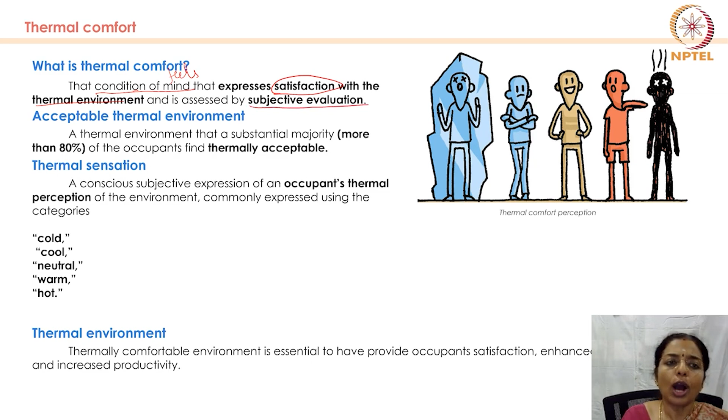It is the condition of the mind that expresses satisfaction with the thermal environment. And this is assessed by subjective evaluation. So how do you feel? How do you feel thermally in this environment? The answer to that should be comfortable. Then we say that it's a comfortable environment.

Then what is acceptable thermal environment? A thermal environment that most people, means what? More than 80% of the occupants should feel that it is a thermally acceptable environment. That is the definition of thermal comfort. An environment where at least 80% or more people feel comfortable is known as a thermally comfortable environment.

So how do you assess thermal sensation? How do you feel? How do you answer that question? If it is comfortable, well and good. If not, then it can be cold, or it can be cool, or it can be neutral, okay, I'm okay with this, or we can even say comfortable, or it can be warm, or it can be hot. This is 5 ways of describing how you feel.

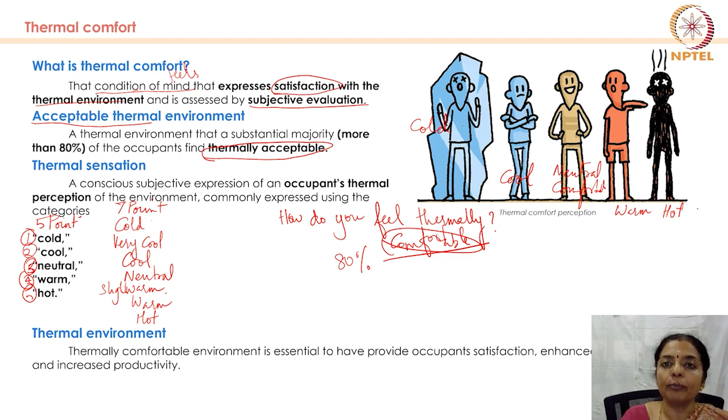So a thermally comfortable environment is essential for providing occupant satisfaction. For the occupants to feel satisfied, it is essential to have an environment which is comfortable, which enhances health as well as increases productivity, because it becomes very important in spaces like office buildings where people work for continuous hours, or classrooms where students sit for long hours. If it is not thermally comfortable, then it affects their health and also their productivity.

So thermal comfort refers to the state of mind in which a person feels satisfied with the temperature of the environment. It is highly subjective and depends on several factors, including your personal preferences, clothing level, activity level, and the surrounding environment. For example, a person coming from a very cold place would feel slightly warm in a place where the native feels comfortable. So, what is your personal preference?

Then, what clothing levels you wear? Suppose in a hot, dry place, you end up wearing a sweater. Then you are going to feel warmer or hotter. What is your activity level? We have seen how athletes who run, they sweat so much, they pant so much, they feel so hot, they drink a lot of water. Marathon runners pour water on their head because of the activity level. And of course, the surrounding environment such as temperature, humidity, wind speed, and the radiant temperature. So these are all the factors on which thermal comfort depends.

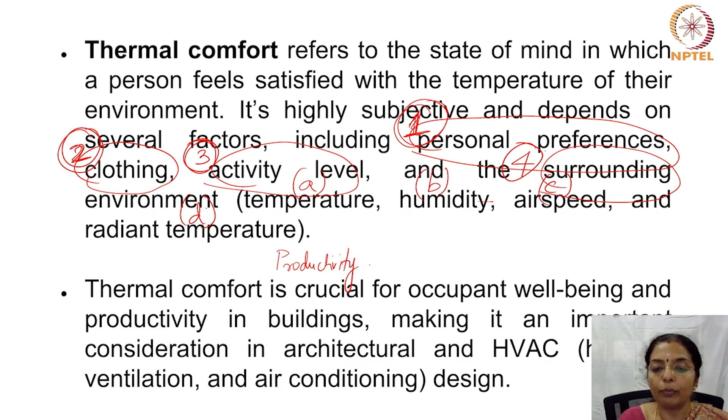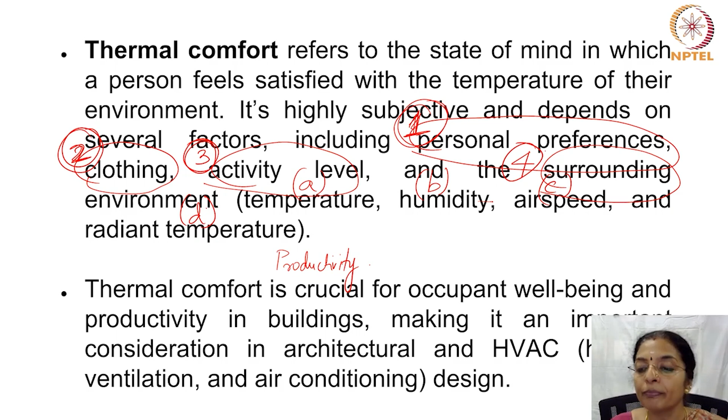So thermal comfort is crucial for an occupant's well-being and productivity in buildings, making it an important consideration in architectural as well as HVAC design. So when the productivity of a person is impacted, then the whole point of designing goes for a toss. If you design a school building where a student is not able to give his 100%, then the whole point of designing the school is lost. Similarly, if you design an office space where the person who works there is not able to give his 100%, then the whole point of designing the office building is lost. And therefore, it is very important that we design thermally comfortable buildings.

So why is it necessary? Why should we design thermally comfortable buildings? So human beings are homeotherms. Therefore, in different environments, even in extreme cold or hot situations, people can maintain their core body temperature in a narrow scope through thermoregulation. So what are these thermoregulations? We will see a little later.

So thermal comfort can also be defined as a person's own awareness of the thermal atmosphere, and it is defined as a person's neutral feeling in relation to a given thermal environment without sweating or shivering. The person's location as well as the climatic conditions within and outside the enclosure influence the thermal comfort standards. People feeling uncomfortably hot or uncomfortably cold are more likely to behave unsafely. Their ability to take decisions or perform manual tasks deteriorates.

Now, there are ways in which the body exchanges heat to the environment. So, how does the body exchange heat? One is through conduction. So, through physical contact, probably with the ground, or maybe with holding something in the hand, the body conducts heat exchange with the object. Second is through convection. So convection is not necessarily through a solid medium. And third is radiation. Apart from this, sweat, exhalation and insensible perspiration through evaporation also happens with the atmosphere.

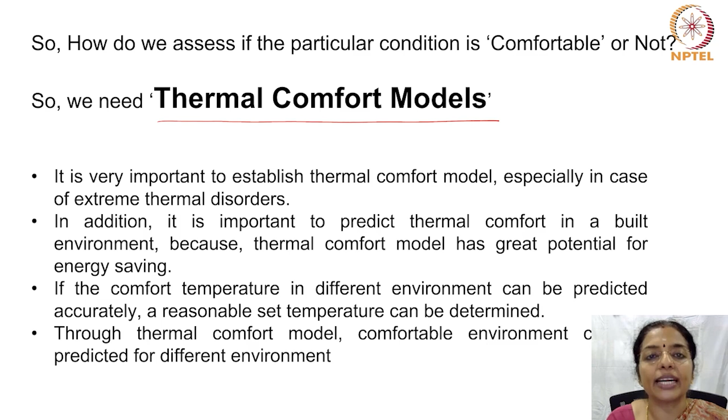In addition, it is important to predict thermal comfort in a built environment, because thermal comfort model has a great potential for energy saving. If the comfort temperature in different environments can be predicted accurately, a reasonable set temperature can be determined. Through thermal comfort model, comfortable environment can be predicted for various different environments.

Let us now look at thermal comfort model. A model that relates indoor design temperature or acceptable temperature ranges to outdoor meteorological or climatological parameters is a thermal comfort model. Comfort models are frameworks which are used to predict and evaluate human thermal comfort in various environments. In architecture and building design, thermal comfort models are essential for designing energy efficient buildings that will maintain the occupant comfort while using very little energy, so that we have to try and work towards designing sustainable buildings.

Now, thermal adaptation to indoor environment happens in three ways. First is adjustment, which is behavioral or technological changes. So you need to adjust to a particular setting. Second is acclimatization, which is physiological and which is based on a thermal history. What do you mean by thermal history? If a body has been exposed continuously to very warm weather, then their ability to tolerate heat becomes more. To tolerate heat, okay, not to tolerate the inner body temperature to shift. That will not happen. Then habituation, which is a psychological adaptation with changing expectation.

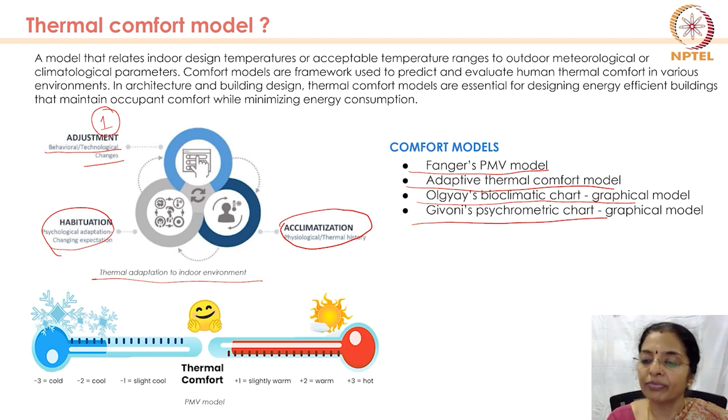So there are various thermal comfort models. There is Fanger's PMV model. There is adaptive thermal comfort model. There is Olgyay's bioclimatic chart. There is Givoni's psychrometric chart. So these we will be looking at, say, the psychrometric chart and so on a little later. We will be dealing with it in detail in another lecture.

So there are two main classifications of thermal comfort. First is the steady state model. So the predicted mean vote model stands amongst the most recognized thermal comfort models. It was developed using principles of heat balance and experimental data collected in a controlled climate chamber under steady state conditions. Therefore, PMV model can be applied to air-conditioned buildings only.

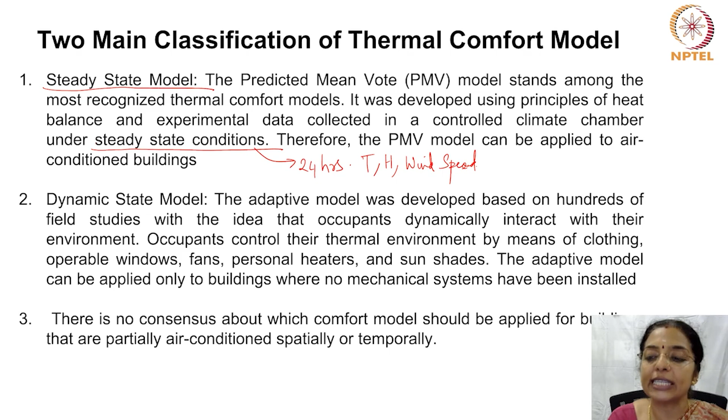So, what do you mean by under steady state? For, say, 24 hours, the temperature, humidity, wind speed, everything is fixed. And in that, people are assessed how they feel. But that is not the reality. In reality, the temperature indoors will not change only in air conditioned buildings because it is set so. Therefore, steady state model is applicable to air conditioned buildings.

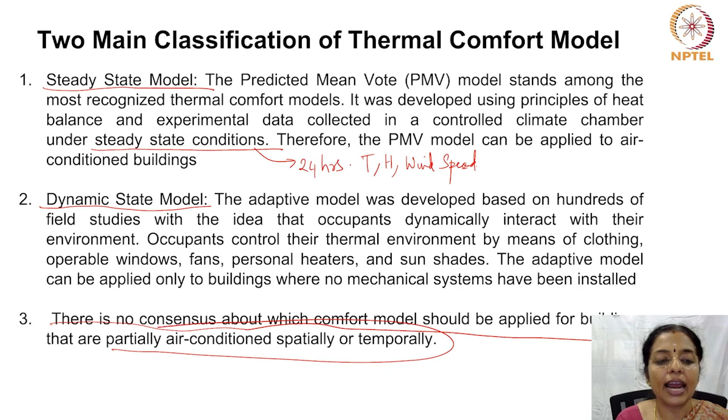Second is dynamic state model. So the adaptive model was developed based on hundreds of field studies with the idea that occupants dynamically interact with their environment. Occupants control their thermal environment by means of clothing or operable things like opening the windows when they feel very sultry, switching on the fans, using personal heaters, and then having some shades and so on. The adaptive model can be applied only to buildings where no mechanical systems have been installed. As of now, there is no consensus on which comfort model should be applied for buildings that are partly air conditioned and partly naturally ventilated.

I am going to talk to you about at least 4 models of thermal comfort, and there is a reason for it. Later on, we will be learning about certain tools to assess appropriate strategies for designing, and in those tools there is mention of these models. So for you to understand what these models are, I am going to talk to you about these models. The first is the ASHRAE Standard 55 and Current Handbook of Fundamentals model.

So ASHRAE 55 was first introduced in 1966 to establish guidelines for maintaining thermal comfort in indoor spaces. Over a period of time, the standard evolved, becoming more precise in identifying environmental and personal factors that influence comfort. The PMV or predicted mean vote and PPD or predicted percentage of dissatisfied model, which was developed by Fanger, has been the foundation of this standard. This approach was suited for climate-controlled environments where variables such as air temperature, radiant heat, air speed, and humidity could be managed precisely. The model was based on assumptions made in controlled environments like climate chambers, and it didn't fully consider behavioral adaptation of occupants.

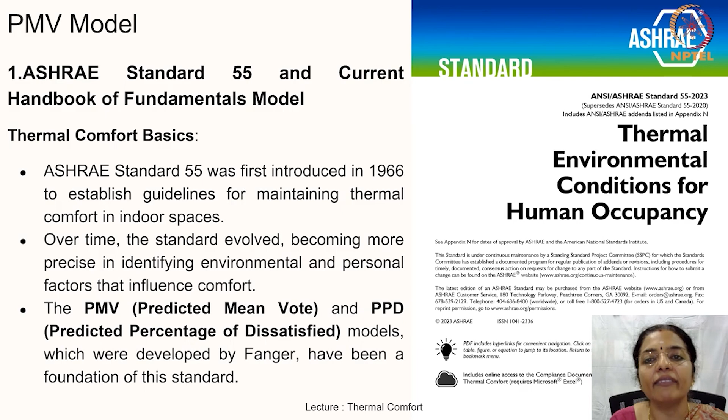The ASHRAE Standard 55 and current Handbook of Fundamentals model is a widely recognized standard for defining thermal comfort in indoor environments, and it was developed and maintained by ASHRAE, which is American Society of Heating, Refrigerating and Air-Conditioning Engineers. The standard specifies conditions under which a majority of people will feel comfortable and provides guidelines for designing HVAC systems that ensure thermal comfort in buildings. This model is applicable to both mechanically conditioned and naturally ventilated spaces.

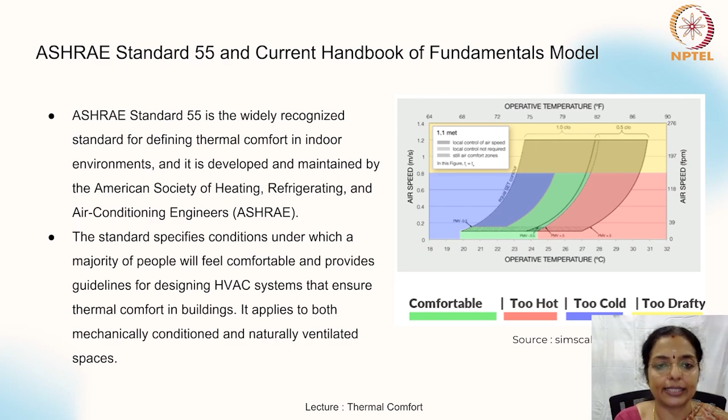So the key components of ASHRAE Standard 55 are, first, acceptable thermal conditions. This standard provides acceptable temperature ranges and guidelines based on different levels of humidity, clothing, and activity. It talks of comfort zones. So it uses comfort zones to define acceptable temperature and humidity combinations that would keep most people comfortable. Then local thermal discomfort. This considers issues like draft, radiant temperature asymmetry, vertical temperature difference, and floor temperature. ASHRAE Standard 55 uses two main models to predict thermal comfort: the PMV-PPD model, which is predicted mean vote and predicted percentage of dissatisfied model, as well as the adaptive comfort model.

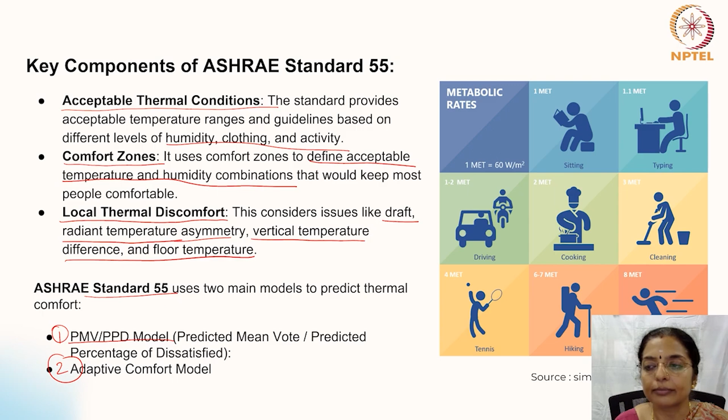Now, what is a PMV? Predicted mean vote model. So, PMV predicts the thermal sensation felt by a large group of people in a particular indoor environment. It is calculated using factors such as air temperature, which is the temperature of the air surrounding the occupants.

The mean radiant temperature, which is the average temperature of all the surrounding surfaces which emit heat. Next is the relative humidity, which is the amount of moisture present in the air. The air velocity, which is measured in meters per second.

The clothing insulation, provided by the occupant's clothing, measured in clo. The metabolic rate, measured in METs, indicates the level of physical activity.

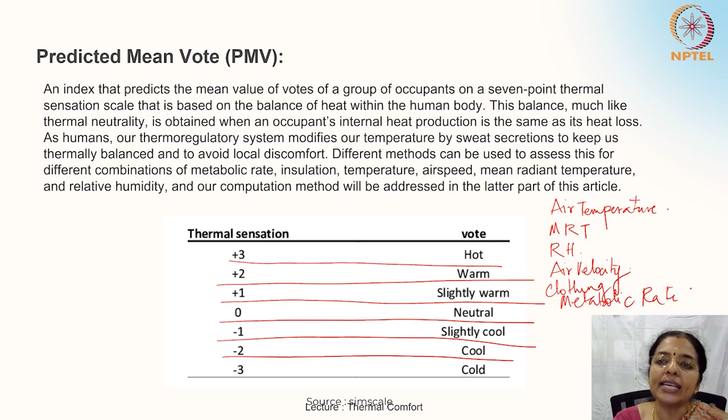These factors are integrated into a complex equation that outputs the PMV score, and that score ranges between hot, warm, slightly warm, neutral, slightly cool, cold. The goal is to achieve a PMV value as close as possible to 0, which indicates that the majority of people will find the indoor conditions neutral and comfortable.

So this is an index that predicts the mean value of votes of a group of occupants on a 7-point thermal sensation scale that is based on the balance of heat within the body. This balance, much like thermal neutrality, is obtained when an occupant's internal heat production is the same as the heat loss. As humans, our thermoregulatory system modifies our temperature by sweat secretions to keep us thermally balanced and to avoid local discomfort.

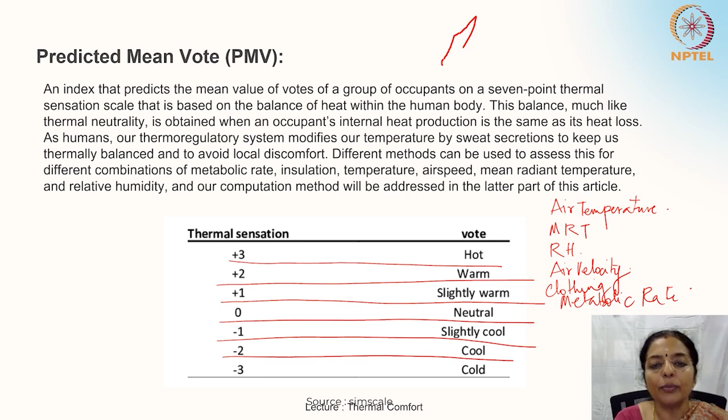Different methods can be used to assess this for different combinations of metabolic rate, insulation, temperature, air speed, mean radiant temperature and relative humidity, and our computation method will be addressed later.

The PPD. PPD provides a statistical prediction of how many people will be dissatisfied with a particular thermal environment. Even in the best environments, when PMV is neutral, that is when PMV is zero, a certain percentage of people will still be dissatisfied because individual preferences vary. This is why achieving 100% satisfaction is practically impossible.

Suppose there is a PPD of 5%. A PPD of 5% is an ideal range where only 5% of people are predicted to be uncomfortable. The target is to maintain PPD value below 10 to 20%.

So PPD is an index that establishes a quantitative prediction of the percentage of thermally dissatisfied occupants who feel too warm or too cold. The PPD is calculated from the PMV, as it can be found from the distribution of individual thermal sensation votes compiled collectively.

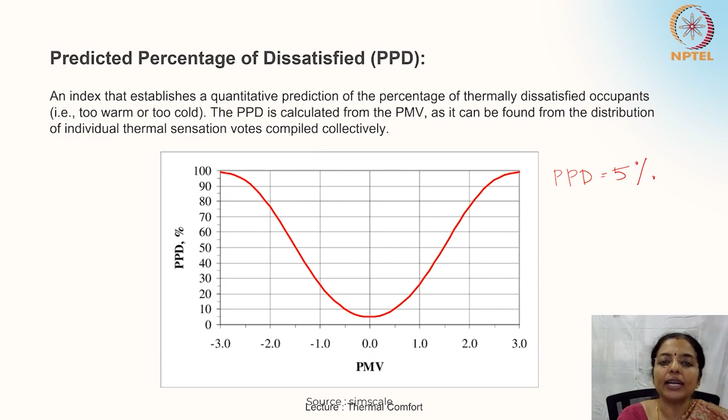The second is the adaptive comfort model in ASHRAE Standard 55-2010. So there was a need for a new approach. Before 2010, ASHRAE Standard 55 focused heavily on mechanically conditioned buildings. These require precise control over indoor environments. You set the AC temperature at 26 degrees centigrade or 24 degrees centigrade. So it's a set temperature.

As interest grew in naturally ventilated buildings, because that's more efficient, sustainable and environmentally friendly, it became very clear that the PMV PPD model wasn't always applicable. People in naturally ventilated spaces tend to adapt to varying temperatures, accepting a wider range of conditions.

Third is the ASHRAE Handbook of Fundamentals Comfort Model up through 2005. So in the pre-2005 comfort model, the PMV PPD model dominated thermal comfort calculations. This approach was suited for climate controlled environments where variables like air temperature, radiant heat, air speed and humidity could be managed very precisely, because these were air conditioned environments. You have to set it on your remote.

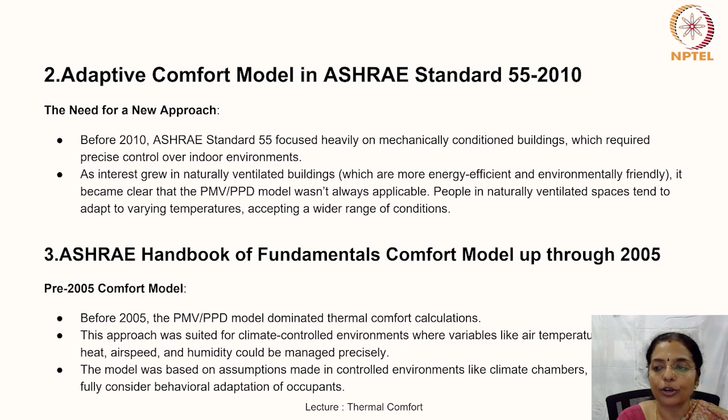The model was based on assumptions made in controlled environments like climate chambers, and it did not fully consider behavioral adaptation of occupants. That was its flaw. So the adaptive comfort model in ASHRAE Standard 55-2010 came up. Earlier, this primarily relied on PMV and PPD models, which were based on controlled laboratory settings.

These models assumed that indoor environments would be mechanically controlled and maintained within a narrow range of temperature and humidity levels. However, these assumptions were not well suited to naturally ventilated buildings, where indoor conditions fluctuate based on the weather and where occupants can take actions to adjust their comfort.

In response to the growing emphasis on sustainable building design and the desire to reduce energy consumption, the adaptive comfort model was introduced in the 2010 revision of ASHRAE Standard 55. This enables building designers to set higher or lower indoor temperatures based on outdoor conditions, reducing the need for energy intensive heating, ventilation and air conditioning systems, promoting the use of natural ventilation.

The adaptive comfort model, or ACM, in ASHRAE 55-2010 is a paradigm shift from earlier models of thermal comfort, which were designed for tightly controlled indoor environments with mechanical heating, ventilation and air conditioning systems.

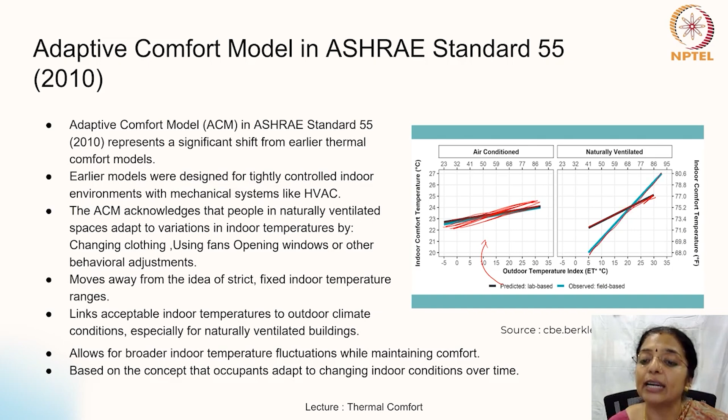So the adaptive comfort model is based on the principle that individuals adapt to their environments and that acceptable indoor temperatures vary depending on outdoor conditions. The model considers the following. Outdoor temperature. As the mean outdoor temperature rises, people tend to accept warmer indoor temperatures. Conversely, in cooler climates, people prefer cooler indoor conditions.

Second is behavioral adaptation. These words you would have seen in my previous slides. So what is behavioral adaptation? Occupants are more tolerant of temperature fluctuations when they can take actions like opening windows to get fresh air, using personal fans, adjusting clothing layers, changing the location within the space like moving closer to a window or away from a window or moving closer to a heat source, etc.

So an occupant can tolerate temperature variations or fluctuations if he has the option of operating windows as per his desire, using personal fans, changing his clothes. If it's very warm, he can change his clothes to something very light, decrease the clo value. And by these two, we mean altering the environmental parameters like wind, relative humidity, sometimes even temperature. Changing the location within space like moving closer to or away from windows or heat sources.

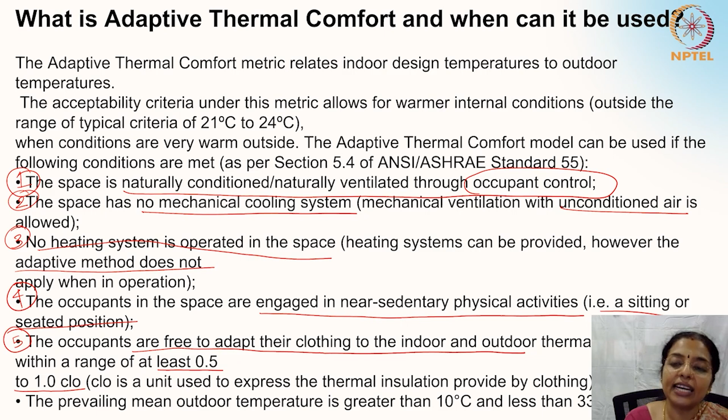The occupants in the space must be engaged in near sedentary physical activities. That is, they should be sitting or in a seated position. They should not do some kind of a cardio activity or weight lifting or something like that. Fifth is the occupants are free to adapt their clothing to the indoor and outdoor thermal environment within a range of 0.5 to 1 clo. Not more than that, not less than that. And the prevailing mean outdoor temperature must be greater than 10 degrees centigrade and less than 33.5 degrees centigrade.

So the broader range is possible because people in naturally ventilated spaces are more accustomed to outdoor temperature variations and have access to adaptive behavior. But this is also true: when the person is exposed to an environment which is cold outside, his ability to shift to a much warmer environment automatically is very difficult.

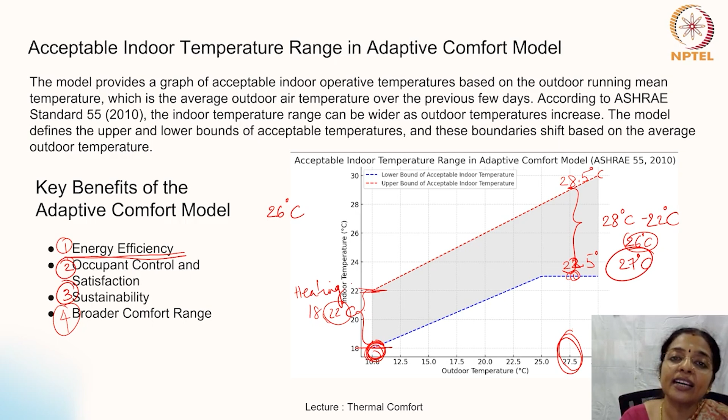Next is the broader comfort range. This is needed. It can't be one number, especially in developing countries. So the adaptive comfort model expands the acceptable range of indoor temperature, which allows for more flexible building design that caters to seasonal outdoor conditions. This approach aligns with modern green building standards such as LEED, which encourage natural ventilation and reduced energy use.

The fourth one is the California Energy Code Comfort Model 2013. This is not really relevant to the Indian condition, but I have put it for a reason, because you will come across this code in another context, and at that time you should not be wondering what that is. So I'm just going to tell about this very briefly.

The California Energy Code is one of the strictest energy codes in the US, and it aims to reduce energy consumption in buildings. The 2013 update incorporated thermal comfort models to encourage both comfort and energy efficiency. This model is largely influenced by the adaptive comfort model and encourages the use of passive design strategies such as natural ventilation and daylighting to reduce energy demand for cooling as well as heating.

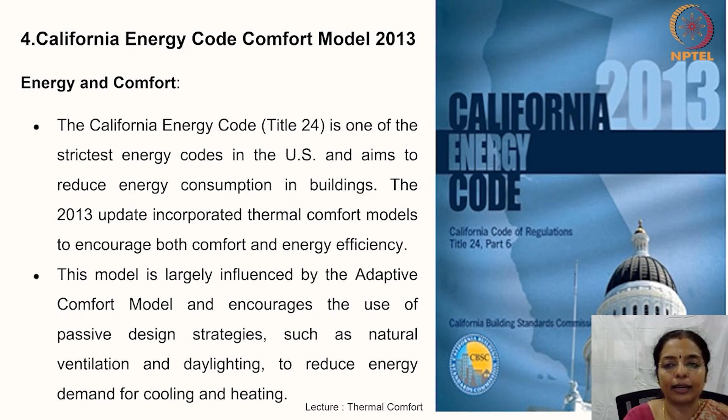The code's purpose is to advance the state's energy policy, develop renewable energy sources, and prepare for energy emergencies. A 2020 study found that the 1978 Energy Code successfully reduced energy consumption, and that the implementation of the policy did definitely have benefits in terms of energy efficiency, in terms of being more flexible, and in terms of being more sustainable.

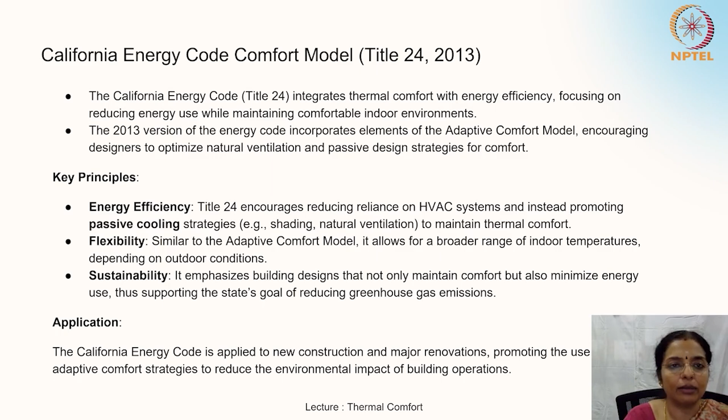You also have what is called the EN ISO 7730. This is a European adoption of the international ISO 7730 standard, and it defines thermal comfort as a subjective way to define if the surrounding climate is comfortable or not. A perfect environment can be summarized as the environment where the occupant feels thermally neutral, does not wish the environment to be colder or warmer, and is not exposed to any local cooling or heating at any place on their body.

Then you have the IMAC, India Model for Adaptive Thermal Comfort. So the IMAC 2014 model was developed from the data collected through 4 survey campaigns in office buildings across 5 Indian cities representing different climate zones such as warm and humid, hot and dry, composite, moderate and cold, all of which we have studied in our previous classes.

4 equations provided for different building types: naturally ventilated, mixed mode, which is naturally ventilated plus air conditioned. Then you had air conditioned. The IMAC models are also compared with ASHRAE 55 and EN 15251 adaptive models. The models show that the occupants in naturally ventilated buildings adapt to outdoor temperatures.

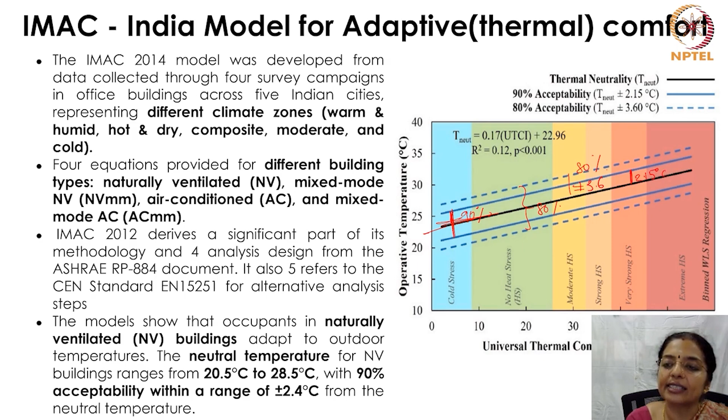Then you have the NBC. So according to the National Building Code 2016, air-conditioned systems for interior spaces intended for human occupancy shall be sized for not more than 26 degrees centigrade for cooling and not less than 18 degrees centigrade for heating. In NBC 2016, the adaptive comfort model was first introduced, duly emphasizing on the indoor thermal comfort, occupant well-being and energy efficient operation of HVAC.

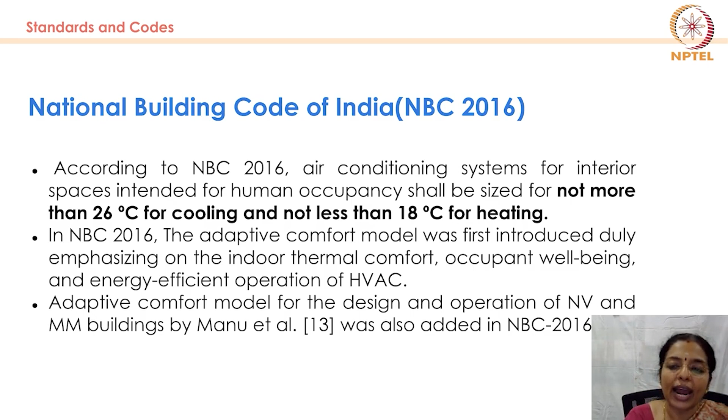Adaptive comfort model for the design and operation of naturally ventilated buildings was done by Manu, and this was also added in NBC 2016. Now quickly let us compare all the 4. So I am taking all these 4 for a reason which you will understand later when we start looking at the tools which I had told you. So the ASHRAE Standard 55 Handbook of Fundamentals, the Adaptive Comfort, the ASHRAE Handbook pre-2005 and the California Energy Code.

If we look at the comfort approach, the ASHRAE Standard 55 follows the PMV PPD model for controlled environments, just like the ASHRAE Handbook pre-2005. Whereas the Adaptive Comfort ASHRAE 55 2010 follows the Adaptive Comfort model, just like the California Energy Code.

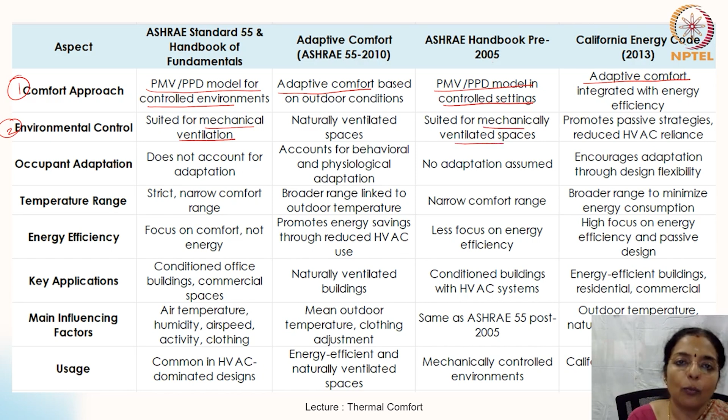If we look at environmental control, the ASHRAE Standard 55 is valid only for mechanical ventilation, just like the 2005 handbook, whereas Adaptive Comfort ASHRAE model is valid for naturally ventilated spaces, and California Energy promotes passive strategies to reduce HVAC reliance.

Third is occupant adaptation. So the ASHRAE Standard 55 does not account for adaptation. Similarly, the pre-2005 also has no adaptation assumed, whereas adaptive comfort accounts for behavioral and physiological adaptation, just like the California Energy Code, which encourages adaptation.

For this temperature range, ASHRAE Standard 55 has a strict narrow comfort range, same as ASHRAE Handbook pre-2005, whereas adaptive comfort model looks at broader range linked to outdoor temperature, and California Energy Code looks at broader range to minimize energy consumption.

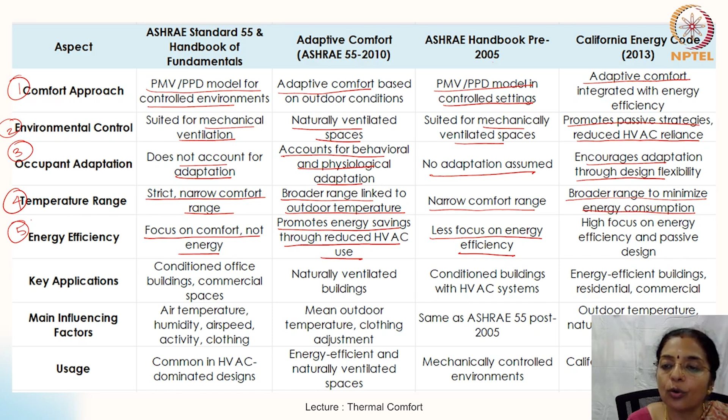Fifth is energy efficiency. ASHRAE Standard 55 focuses on comfort and not energy. Similarly, the pre-2005 ASHRAE handbooks also focus less on energy efficiency, whereas the adaptive model promotes energy savings through reduced HVAC use, and the California Energy Code has high focus on energy efficiency and passive design.

Sixth is key applications. So ASHRAE Standard 55 Handbook of Fundamentals along with ASHRAE Handbook pre-2005 looks at conditioned office buildings and commercial spaces, all reliant on HVAC systems. Whereas Adaptive Comfort model looks at naturally ventilated buildings, and California Energy Code again follows energy efficient buildings in residential and commercial.

Next is main influencing factors. So air temperature, humidity, air speed, activity and clothing levels are the influencing factors. This is same as ASHRAE Handbook pre-2005, whereas adaptive comfort model looks at mean outdoor temperature with clothing adjustment. The California Energy Code follows outdoor temperature with naturally ventilated buildings.

8 is usage. So both the ASHRAE 55 pre and post 2005 look at common HVAC dominated designs which are mechanically controlled, whereas the adaptive comfort looks at energy efficient and naturally ventilated spaces, and the California Energy Code looks at buildings in California to be designed for energy efficiency.